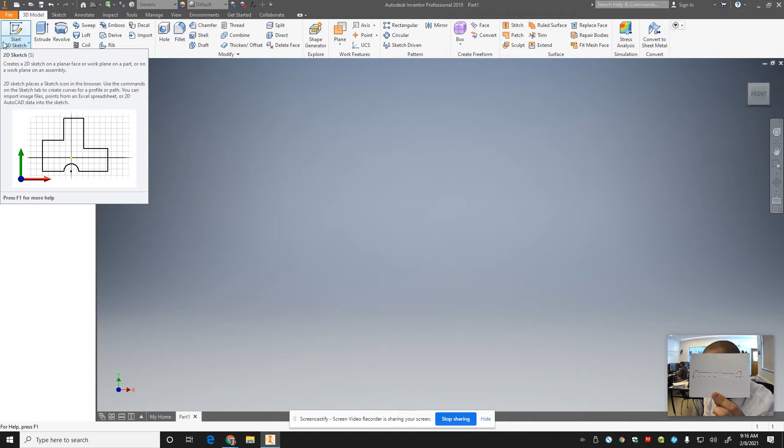I'm going to show you this type of design. It's a fairly common design, reminiscent of the lightsaber that Luke ended up building. It's got these ridges up towards the end, and I'm going to show you how you do that. It really comes down to the first sketch you do. There are actually a few ways to do it - you could do it in the first sketch, or do it once and then pattern it. I think I'll show you a couple different ways to do this.

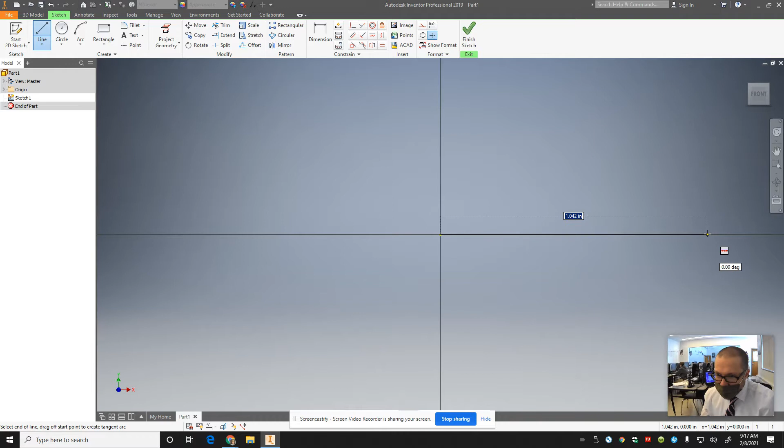All right, so there's the first sketch. We're gonna start a 2D sketch on this XY plane. I'm gonna start with a line about 5 inches long. 5.0. Bam. Zoom out a little bit, see where we're at here. Now the end of the handle is going to be one of the widest parts on this design. Let me see here, I'm kind of using my sketch as a reference.

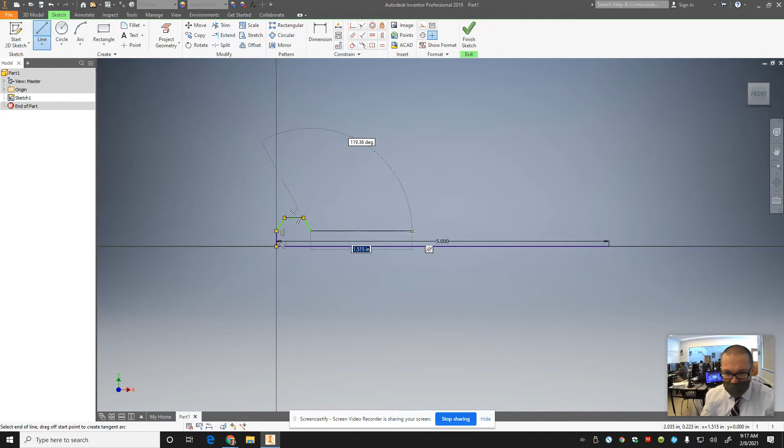This is going to be a grip. I'm just kind of winging it right now. Make this a little bit smaller in here. This is where the bumps are going to be. Probably should make that smaller actually.

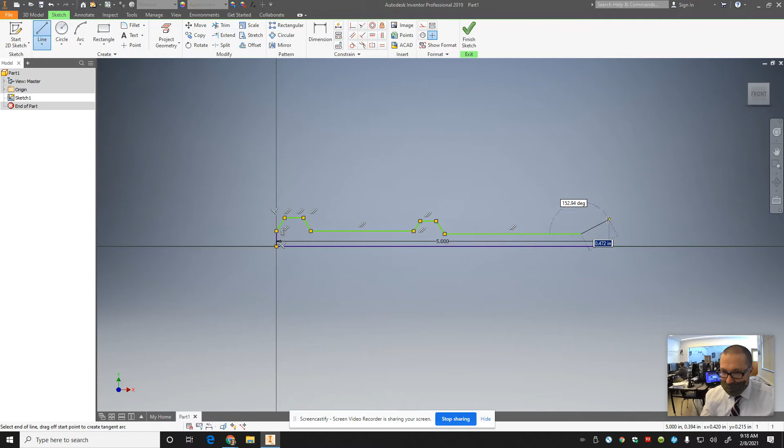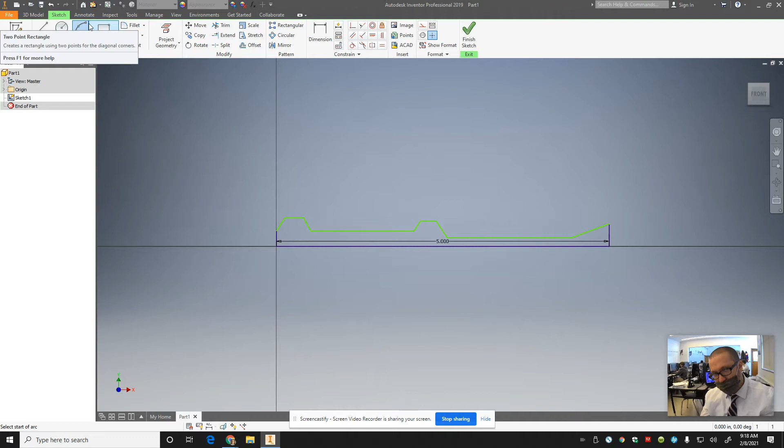All right, a couple ways to go about doing this. Let me make this in here. So I want to put some bumps down here, right? Probably the way to do this is with an arc or a circle. Let's see here. Again, I'm kind of freehanding this. What you can do is rectangular pattern that circle up the length of the lightsaber there.

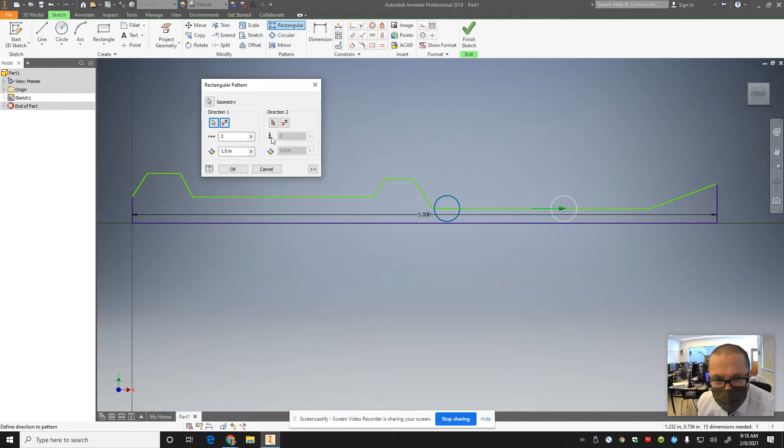All right, you adjust the spacing down. Actually, I should probably get a dimension on here. So 0.219 - let's see what 0.2 looks like. All right, good. And actually, I should probably go back and dimension some of this stuff too, make it even. So 0.40 is actually probably a little bit too large, but we'll see what it looks like when we revolve it.

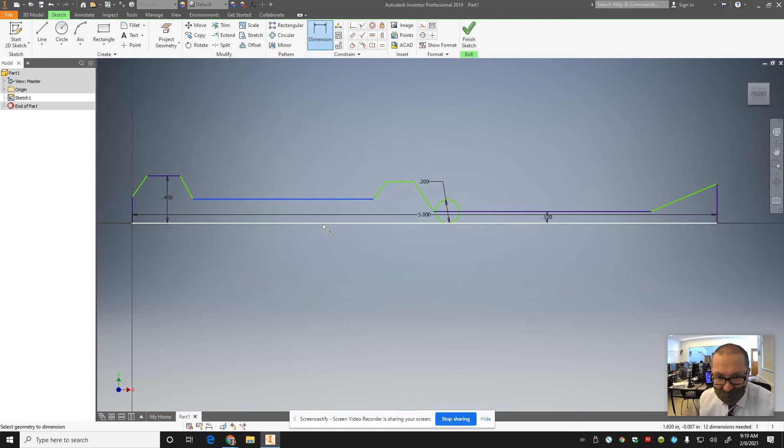Just kind of rounding these up to their closest whole number, sort of - well, it's a decimal, so I guess it's not exactly whole. It just will make your life a little bit easier if you have to keep track of anything.

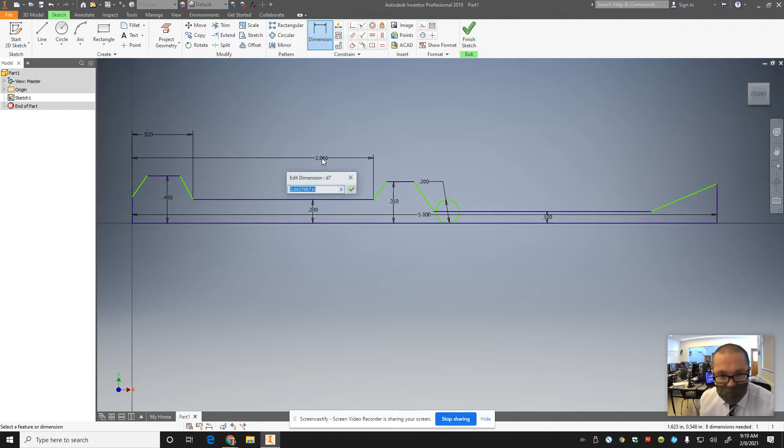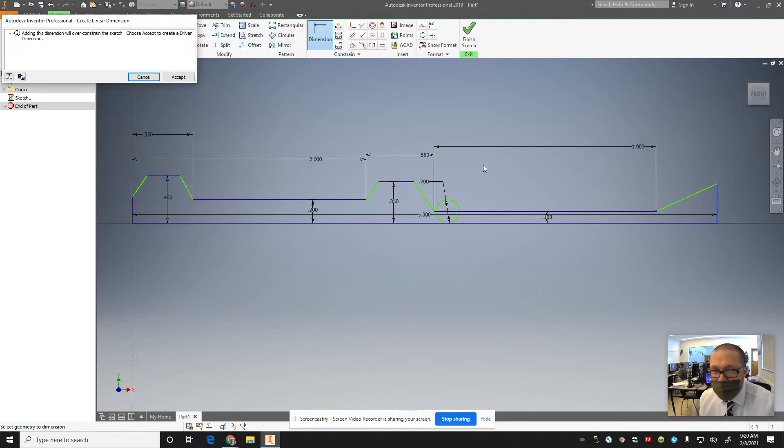Oh, so that was quite a drastic change. And this will be a fairly standard number. Let's see what this height is. Here, I'm just rounding this stuff up. 0.35. All right, so now I'm going to rectangular pattern it.

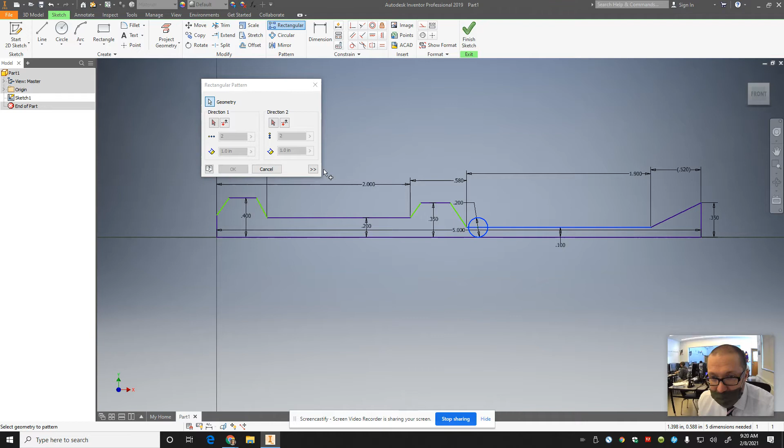The diameter is 0.2, right? So that geometry - oops, not circular, rectangular. This geometry - oops, messing up here because it's selected. Rectangular pattern this circle up this line, but I got to kill the spacing, right? I want them to be right next to each other. So let's see what 0.2 does.

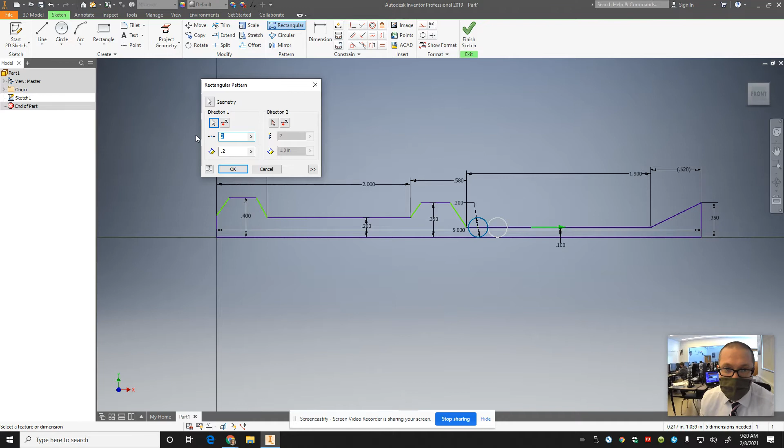Yeah, 0.2 puts them right next to each other. So let's figure out how many. 8? No. 9? Almost. 10? Yeah, 10's good, but then look, this is coming out of there. So I'm going to do 10, but then this dimension, right? Delete that dimension. I'm going to make this a little bigger. Make this 2.0.

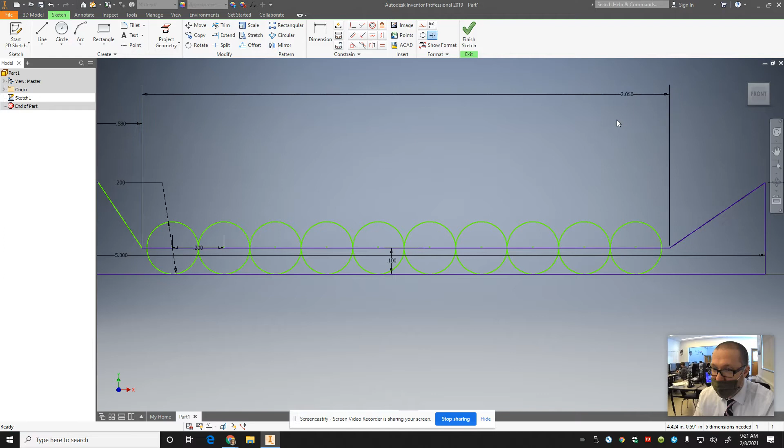Okay, not quite. 2.1 - a little too big. 2.05 - yeah, a little bit. Actually, you know what I can do? Make this circle, this one coincident with that, move them over. Let's try 2.0 again. Escape. There we go, that's perfect.

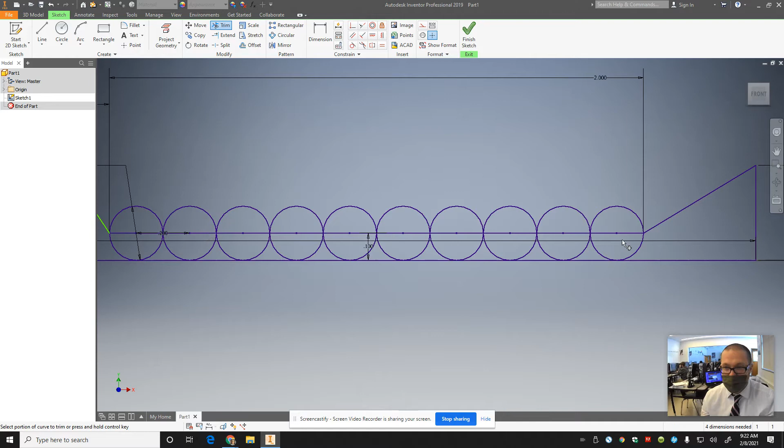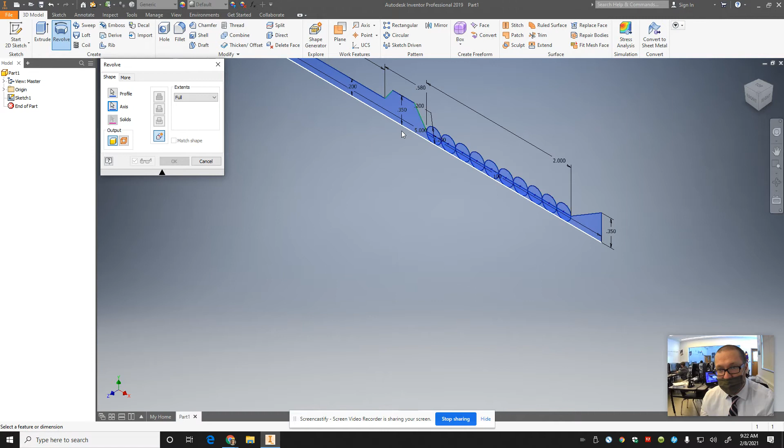Alright, now I don't think I'm going to be able to trim that circle because I patterned it, nor the middle. But that's okay - watch, when we revolve it, we just got to make sure we get everything selected. So that surface, but also this, this, this, this, this, this, and this. The axis is going to be this. And hit OK.

Alright, so that looks kind of silly, right? Those circles aren't big enough - they just need to be wider.

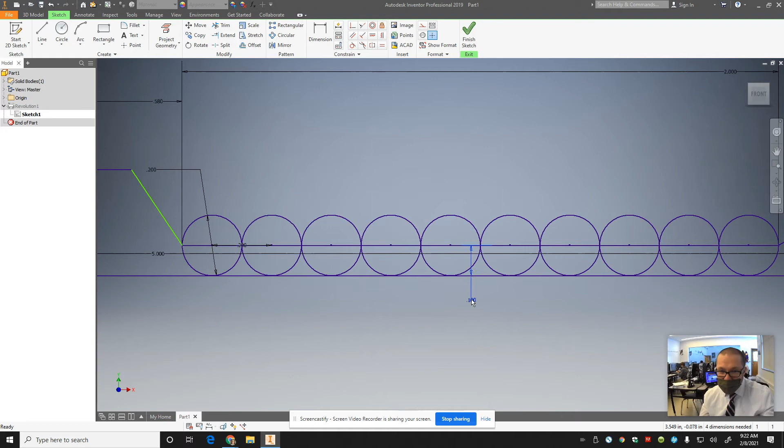That looks kind of stupid. That's okay though, that's kind of what happens, right? So I'm going to go back into this sketch, grab this line here, and move it up. Let's try 0.2. Hit finish sketch. All right, that looks quite a bit better.

So you just go back and edit your sketch dimensions. Now the grip here, I'm thinking what would be good here. All right, so this is your basic, just your basic first revolve. You're not really there yet, you've got to start adding features.

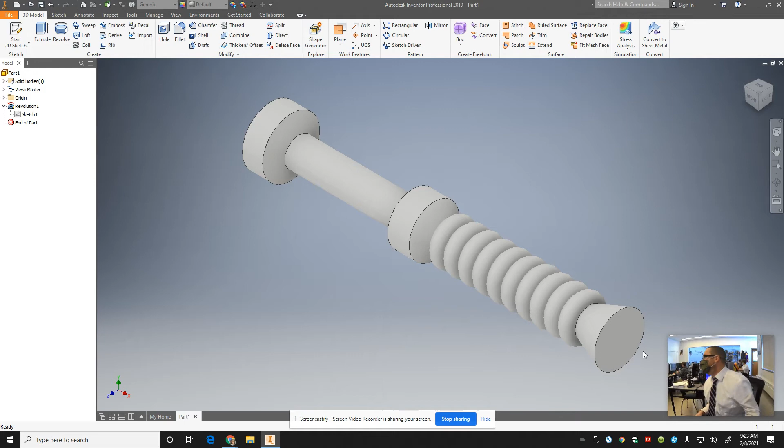And this doesn't need to be a circle, right? This could be like half of a hexagon or something. That might look cool. Whatever you want.

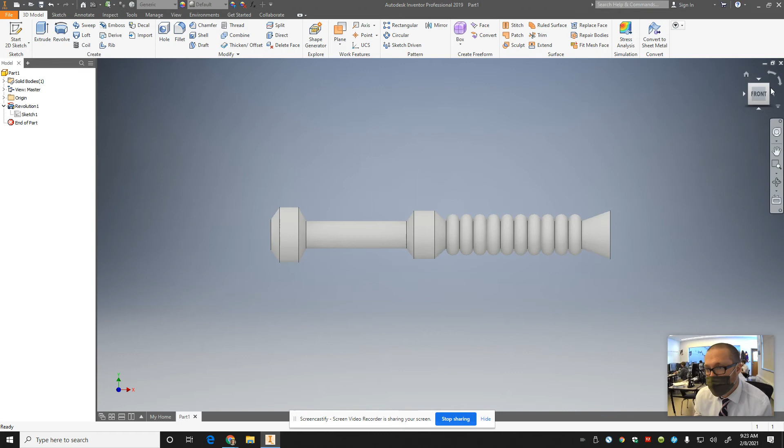Now down here, let's see what would be fun. All right, let's start a work plane. Plane, let's see, parallel plane through a point, tangent to surface, normal to axis.

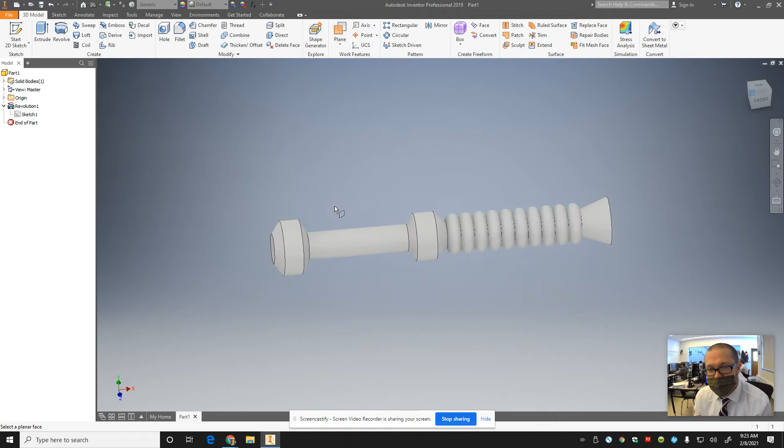Let's go up, let's try offset from plane. So we've got to offset it from the back of this, and I've got to put it inside of the body here of the model, right? I want this work plane like somewhere in here.

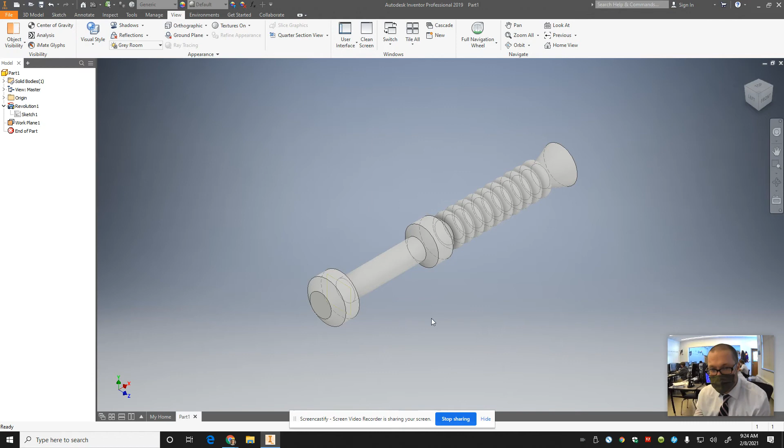I can't see it, right? So you've got to go change your view, visual style, shaded with hidden edges. There's that work plane. I'm going to start a sketch on that plane that's inside of the body. That's why you've got to change your view, guys.

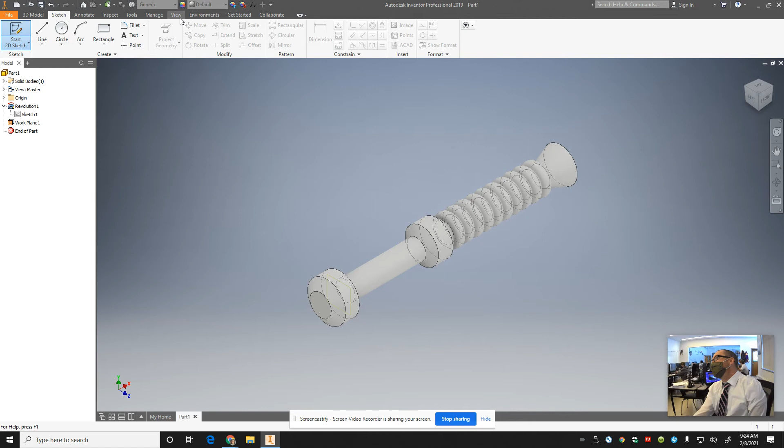One of the most common things is that you change your view, like you can't see what you're trying to do because it's inside of the model, which is something we do a lot when you're doing a more advanced design. So you go up to view, visual style, shaded with hidden edges, right?

I'm going to go back to here and start a sketch on this work plane, and I'm going to draw the grip. Now what I'm going to try to do is draw a shape on this plane and extrude it into this side. So I don't want it to go above this thing. I want it to come even flush with that and see what it looks like.

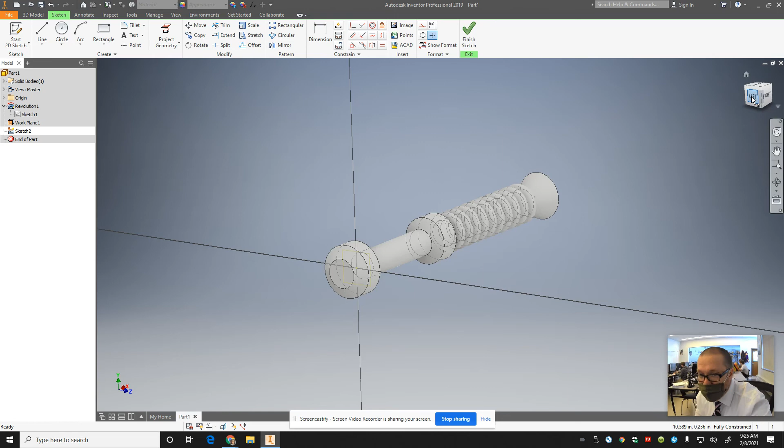So I think I'm going to do... so up to there is where I want it. I want it to start somewhere down in here, go up to there. And I might just do a rectangle.

Center point rectangle starting like here. I want it to come up. Oh, 2-point center will be fine. Start here, I want it to come up to there.

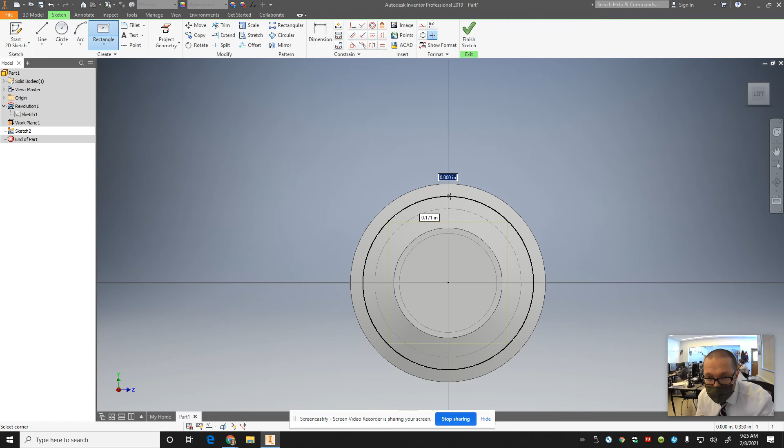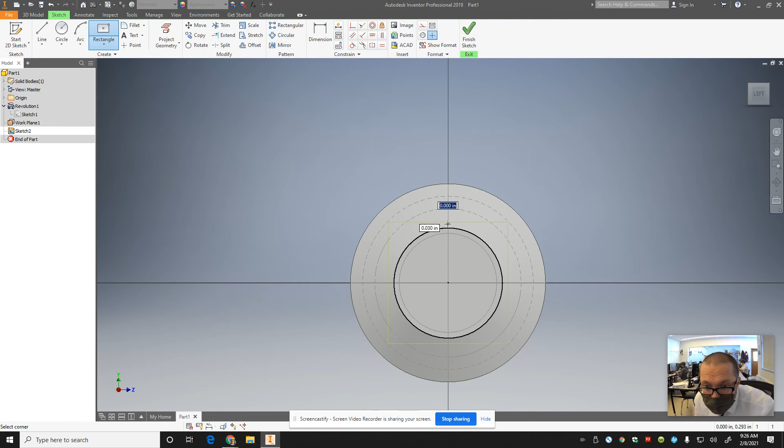I don't know why it's not... what's going on here, snapping. Hit escape, let me try that again. Hold down Control.

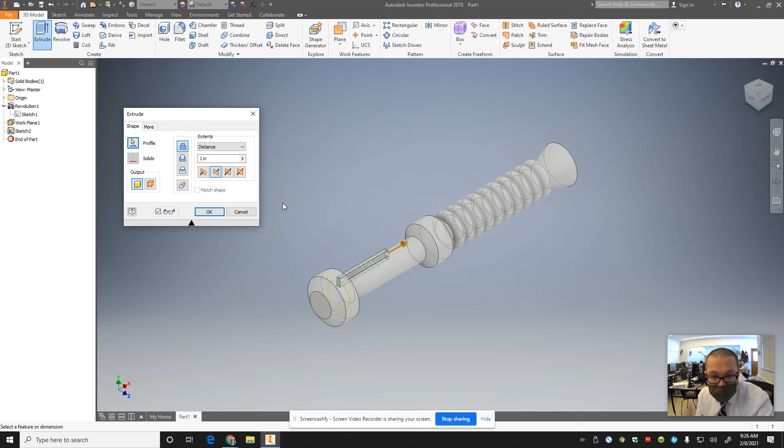All right, so I'm going to extrude that shape I just drew. I'm going to send it the other way. I'm going to send it all the way into this thing. All right, hit OK. All right, so it's going all the way into that thing.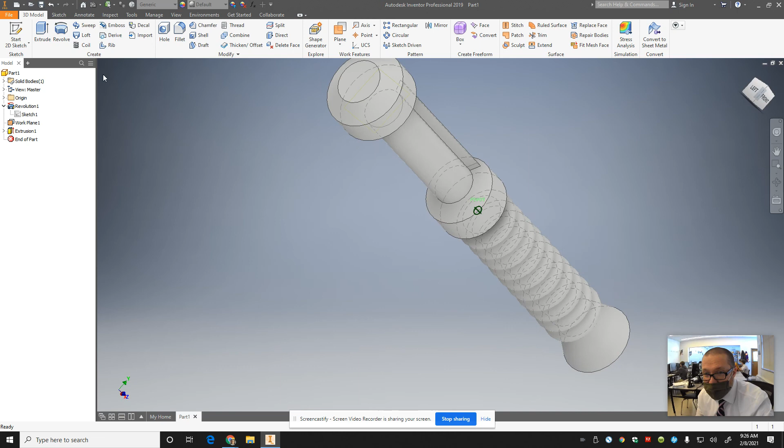Now I wanted it to be higher, so I didn't have the right circle, I wasn't referencing. Oh, it's got to go up to there. All right, so let me grab this side, make it a little bigger. Oh no, oh no, that's not good.

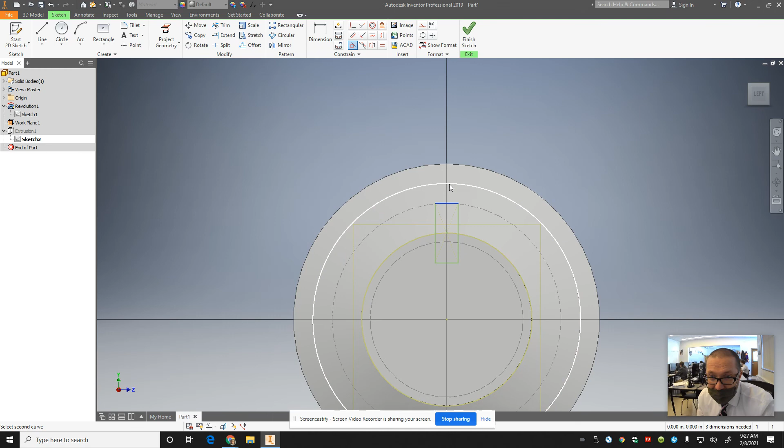Oh, come on. Let me project this geometry into here. I'm going to make it tangent, I'll make this line tangent to this line. There we go, that's what I want. Cool, so that's coming in there, tangent.

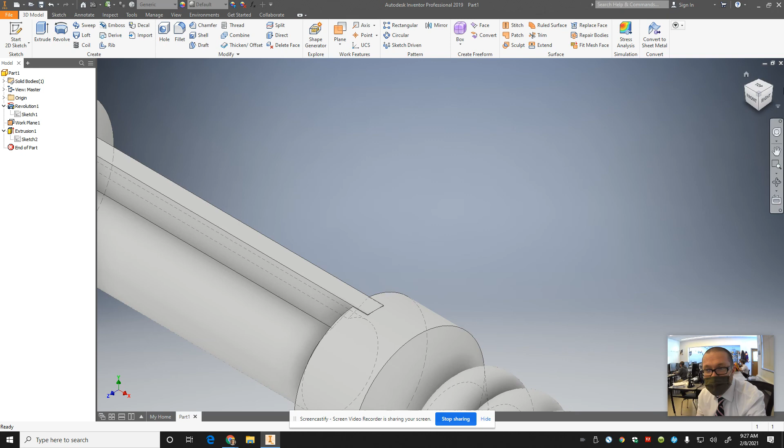I might try to revolve that off. I don't know, we'll see. Cut that off, let me go back to that sketch. Tangent was too far, I can do that.

Make this point coincident to that. There we go, this will look better. That puts us right up to that line. Now just a little bit below it.

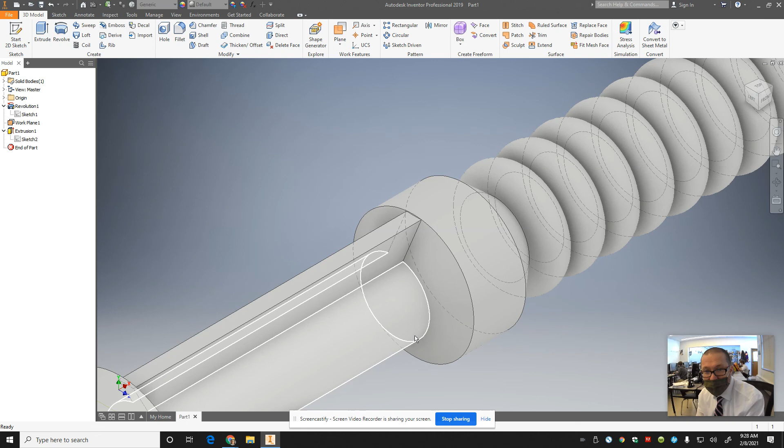I'm going to chamfer this thing, 0.02 maybe? Yeah, that looks cool. All right, apply, cancel, then I'm going to circular pattern that.

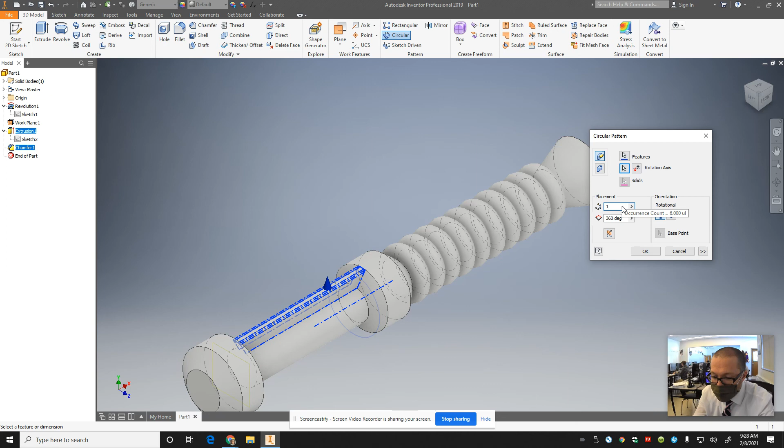Circular pattern features here, chamfer. Rotation axis is this one. You can do like 10, 12. Working... yeah, there we go.

All right, so now there's a grip. Let me change my view so you can see it a little bit better. Shaded with edges. Great, so we did an offset work plane to make that one.